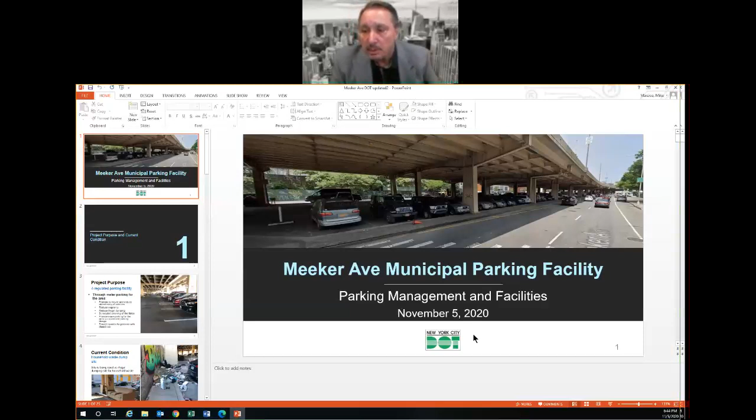So now if I need to share the presentation, do I have access to do so? Jimmy, make sure you can see the controls. I see chat, polling, settings info, but I didn't see share screen. It's on the bottom. Share, stop video, then share. Carlos, can you share it? Let me see if I can do it. I cannot see the sharing screen on my end. Let's see if I make it full. I can't do it, it's not coming up. Can you guys see this? Can you allow Mike to share the screen? It's going to him now. Let me make this full size. Can you guys see this now? It went to Jimmy. I cannot see it on my end, I'm checking the settings. I'm using my tablet so I don't see share screen like with other programs. I'm not sure if that's a fault on my end or I'm not really well versed with WebEx. Share content, share new whiteboard, that's not it. Let me try again. Share file, these are my Zoom backgrounds, but that's not what we want. Michael, are you trying to share the screen? Yes I am, let me see if I can do it now. You guys can see it? Do you guys see anything? I'm not sure if it's visible now. Now it went to Jim, it went to Michael. No, I'm looking at a whiteboard, let me take that off. I'm going to share. Oh here we go, I can get this up. Just give me one second folks, I apologize for the delay.

Meeker Avenue Municipal Parking Facility, our unit is Parking Management Facilities, and today's date is November 5th, 2020.

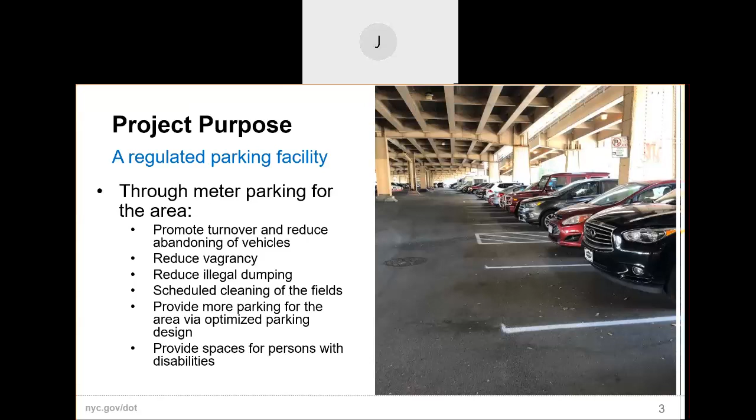The project purpose and the current condition. New York City DOT is trying to regulate the parking facility on the BQE, as Carlos mentioned earlier, through metered parking for this area. This will help promote turnover, reduce abandonment of vehicles, reduce vagrancy, reduce illegal dumping, schedule cleaning of the fields, provide more parking for the area via optimized parking design, as well as provide spaces for persons with disabilities.

As well as construction waste dump site, as you see also in the picture, unauthorized disposal of construction waste found on the site as well.

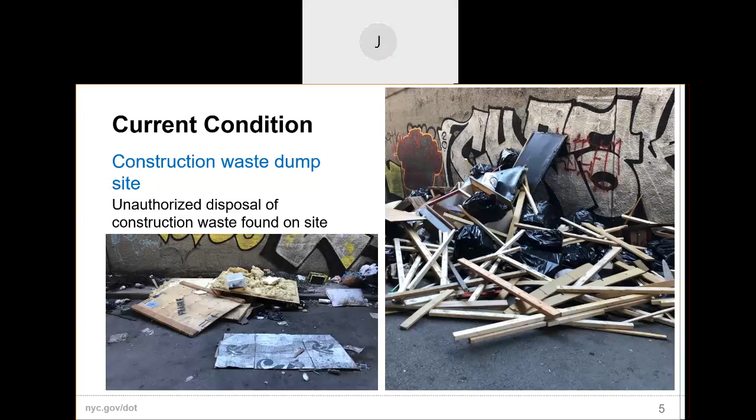Also, in the current condition, we found that some of the area of the site is being used as a makeshift shelter, as you guys see on the two pictures we're presenting right now.

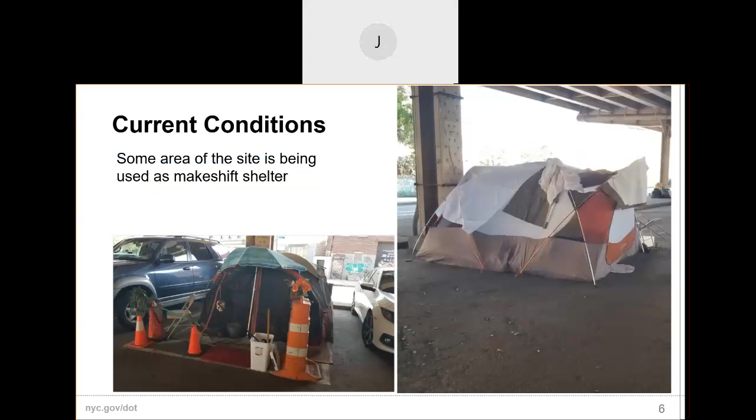The current condition: currently we have cleaning regulations, where the location is treated as an on-street site with alternate side parking regulation for street cleaning. The regulation is as follows: Monday and Thursday 11:30 to 1pm, as well as Tuesday and Friday on the other side from 11:30 to 1pm. The ASP mandates moving of vehicles, thus reducing capacity, so people technically have to move their vehicle during this time.

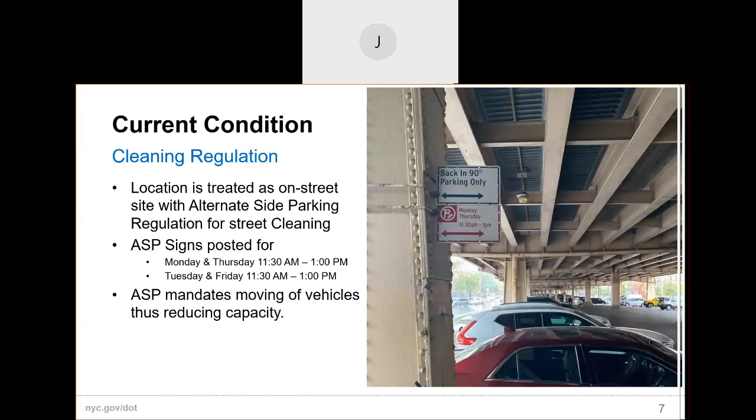The project details.

So the project area lies between Greenpoint and Williamsburg neighborhood. Site located on Meeker Avenue between Metropolitan Avenue and Morgan Avenue, underneath the BQE.

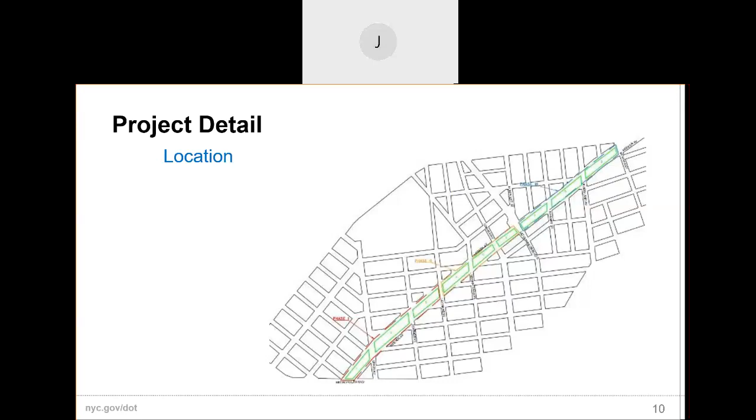That's the location, which has 3 phases. So we're looking at phase 1 at this point in time, folks. We are focusing, as Mike mentioned, right now we are working in phase 1. Some people went to the site this morning or yesterday and looked at the location - that's technically phase 1, as Michael mentioned. That's what we are focusing on right now.

The project benefits. The project improves long-term access to retail and commercial parking, as the area is changing, promoting commerce for the area. It provides long-term parking for workers away from the storefronts, freeing up curb spaces for residents. It provides a cleaner, safer environment for motorists, bicyclists, and pedestrians, and metered regulation will make it easier to provide maintenance, upkeep, enforcement, and turnover.

Competing curb uses and the availability of parking - this facility will provide parking options that increase the parking supply. Overnight parking will be available, but the meter regulation prevents long-term storage of vehicles. With the advent of more restaurants on the curb, demand for the curb continues to grow. We feel this provides an additional parking amenity, but a complete parking structure - not just parking, a use for all users: bicycles, pedestrians, and so forth.

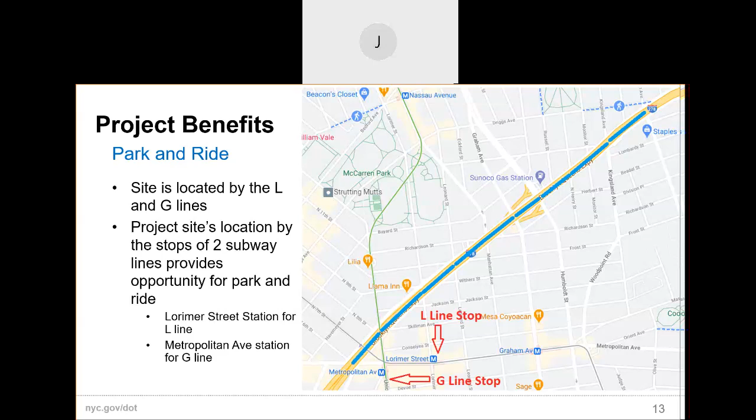Snow removal will be provided for the site as well. Field inspections will be done regularly to ensure safety and serviceability, and meter parking regulation will be enforced.

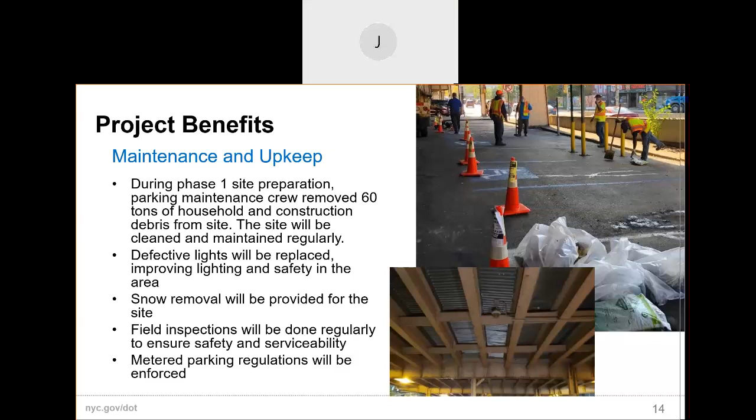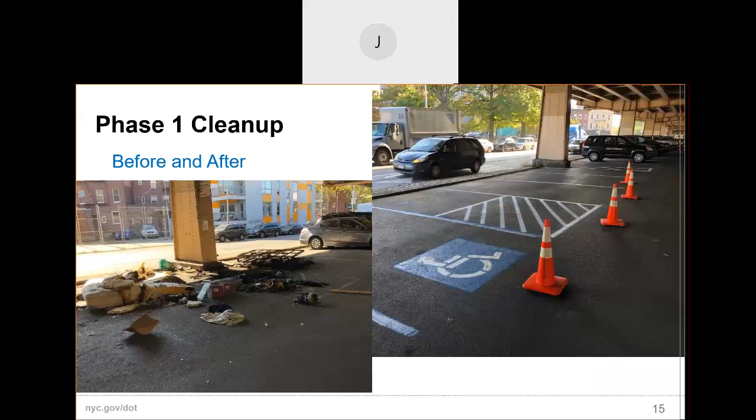Phase 1 cleanup. We are showing some pictures of before and after, how it looked before and how it looks now. This is the first set of pictures. Second, also before and after - if you see, a lot of garbage, a lot of construction waste and household waste. And as you see in the second one, that's how it's being cleaned, and our crew working in the back there.

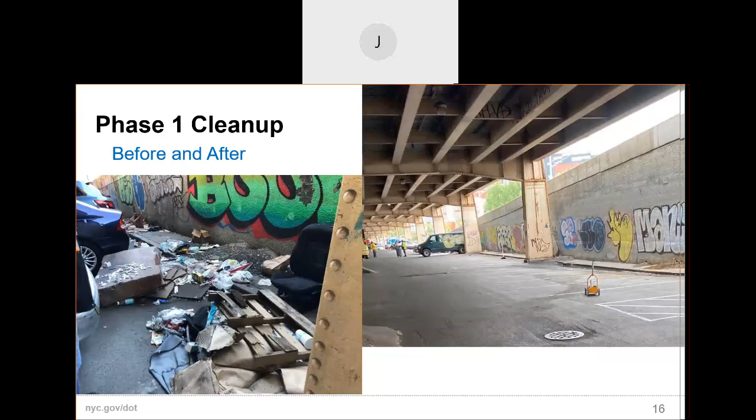Also a third picture showing before and after. This is all debris that was dumped - construction debris. There was a giant granite block that we found; we had to actually break it up. Somebody dumped it there. 60 tons - we have a receipt, 60 tons of garbage. That's a lot of garbage that was there. And remember, all that debris takes up space that people could be using.

Future opportunities: a bike lane. So basically, making this parking regulate the area is gonna prepare the way for a lot of amenities in the near future.

So the implementation of this facility provides a canvas for future bike lanes and other amenities. Parking is working with other DOT divisions to ensure that those future bike lanes and other amenities can be accommodated there. DOT is also working on the design of the bike lane and plans to return in the spring with plans.

These plans reflect previous workshops and community conversations. At this time, the demand and utilization of the facility will be better defined to accommodate a comprehensive design that serves all.

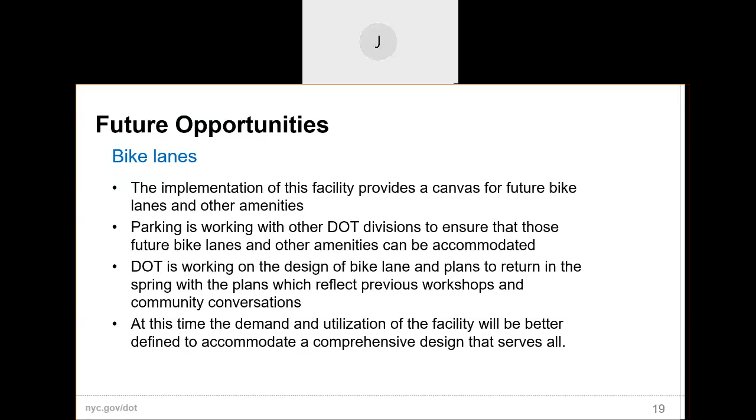As Mike mentioned, now we are pursuing phase 1, which is going to give us a clear idea how we can move forward with the second and third phase. We feel it'll be a good litmus test for what's going to help the community the most.

We want a complete facility. We will work closely with our bicycle folks because that's important. This has to serve all modes of transportation, and that's mission critical.

I know you guys have been working with Sean Quinn, Ted, and some other folks. We work closely with them also, but we felt that they have a timeline. We could get this thing in, see how it works, get a sense, put our toe in the pool first, and then as it goes, modify it.

Pavement markers we're putting down can be removed. We're using ones that are not temporary, but can easily be taken up to modify this to accommodate the bike lane.

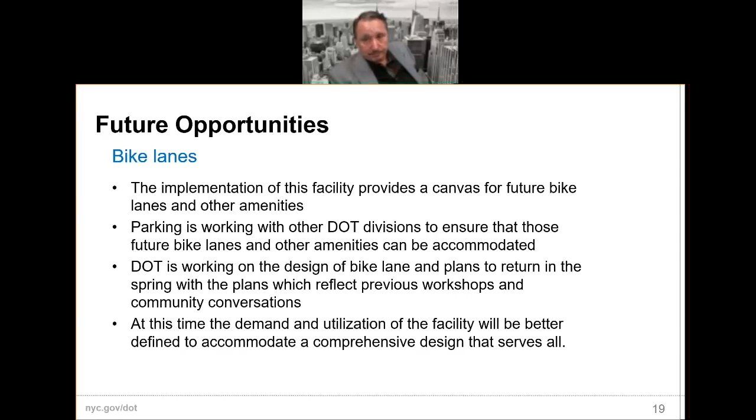We're excited about the potential for car share because if one car share spot can take 5 or 6 vehicles off the curb in a residential neighborhood, that's a really good thing as we see it. And it helps the environment. It helps a lot of other good things. It's very green for us to do.

So these are the things we will be looking to push and move forward with. And we see it from experience as successful on the other parking fields. We hold almost 31 parking fields in the 5 boroughs, and most of these off-street parking fields have car share, and it seems the program has succeeded, starting with a pilot.

I believe now they have it as a permanent program. So we would work with the car share folks we work with, and obviously the key community board, to see where it makes sense and how many we would like to put out there. What people typically don't like is thinking this is going to take away their existing parking. But since we are cleaning this area and providing more parking, this would be something we wouldn't be taking away from anybody to provide this amenity.

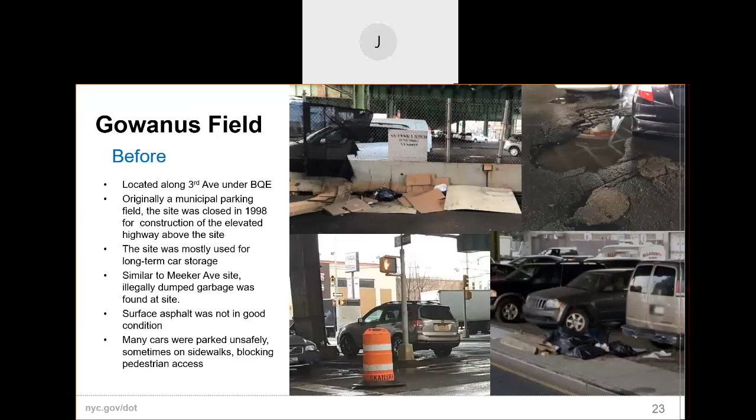And now, after—next please—and now you see the after.

We started this project as a pilot. Industry City asked us if we could regulate two bays, from 35th to 37th. After we activated these two bays, the community board came back and said, continue, we need to regulate the whole area. So we succeeded in providing phase 2, which included an additional 5 bays. Now we're working on phase 3, which will provide 6 more bays by the end of this year, bringing us to almost 13 bays regulated total.

A bay runs from one cross street to another, not a parking stall. It covers from 30th Street to 43rd Street by the end of December. Right now we have it active from 30th to 37th Street, and that's already active and being regulated.

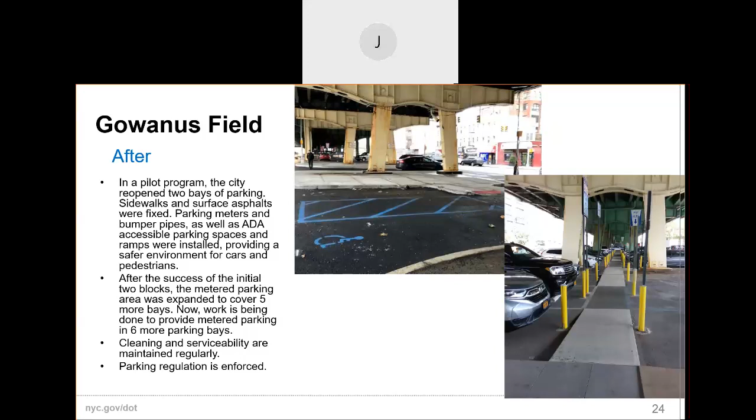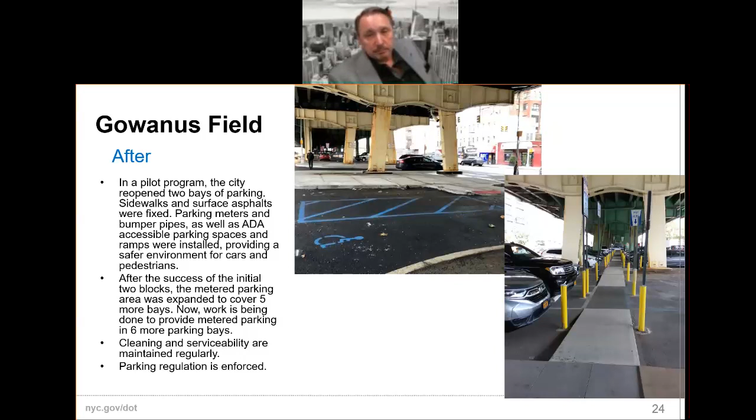As you can see, it's beautiful and clean. People loved it—we got very positive feedback. This was one that folks really liked, and I think it served a niche; there was a need for it. That's why we expanded it, and it made us think this could be a good fit for the Meeker area. We felt Gowanus was a successful program and facility, so we believe Meeker would be the same.

I want to add that at Gowanus we have almost 90 to 95% occupancy, one of the highest after we regulated the area. That's technically the end of our presentation. If you guys have any questions, we welcome them and will answer to the best of our ability.

Okay, now if I can get things back to where we were. It's always good—easy to get here, hard to get back to where we should be.

We wanted to go over this with you folks. We're interested in working with you—if we can share the design and layout, we could put pavement markings down that could easily be removed when the bike lane comes through and the final design is set. I know they're working on it now, and it'd be great to have the Kosciuszko connected all the way through, keeping people from riding in the street. We'd be excited to be part of this overall plan to provide this amenity for all.

Okay, well—thank you. All right.